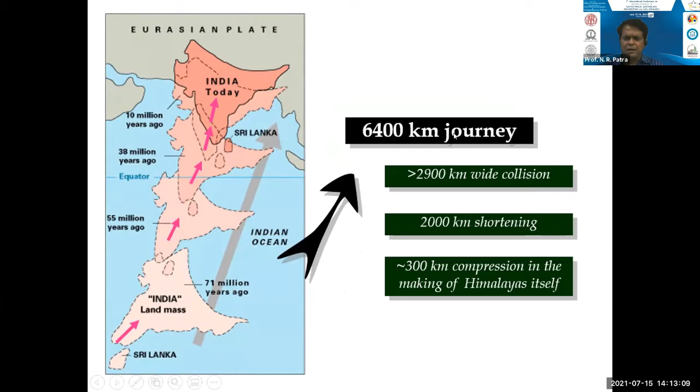Let me start briefly with how the Gangetic Plain has been formed, particularly in India, and how the Himalayas formed. It is about a 6,400 kilometer journey, and it started with 2,000 kilometers, and 300 kilometers of compression in making the Himalayas itself.

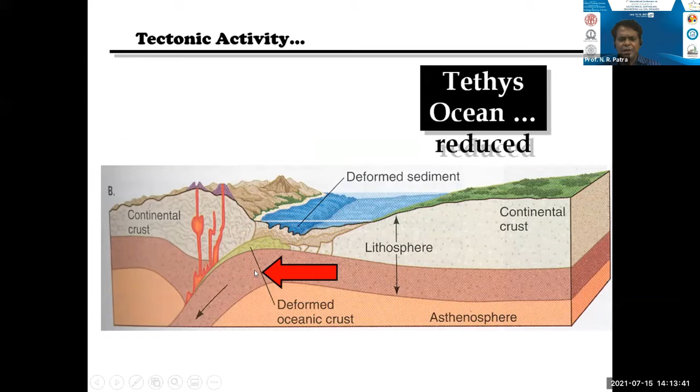Now in brief, how this Gangetic Plain starts. If you look at tectonic activities, initially there is an oceanic crust and lithosphere and sediments, and volcanoes are there. Over the period of time, this lithosphere deforms, and there is deformed sediment here, and deformed oceanic crust also. Over that period of time, new sediment mounts, and this broken off lithosphere continues and sinks. Then remains of the Tethys Sea - this is how the geological map of India looks.

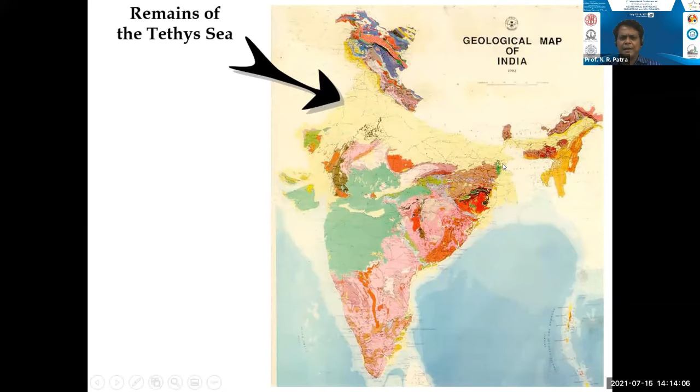Now, if I take it back, this is what we call your Gangetic Plain. It is one of the most seismically active regions in the world, I can say.

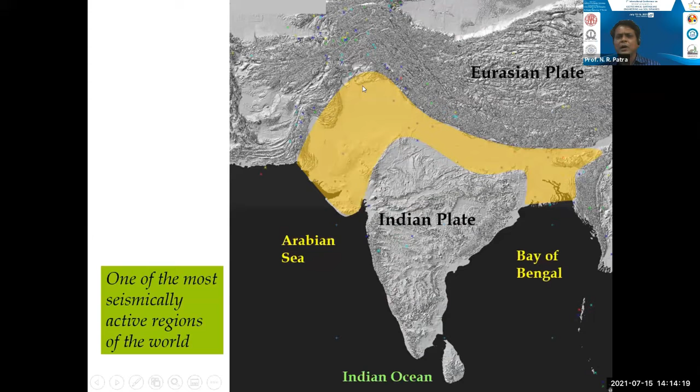These vast alluvial soils have plants and particularly ash dikes, in your power generation plants, coal ash based. These ash dikes require huge land and proper utilization is required. Based on that study, DST has given support, and we are moving forward.

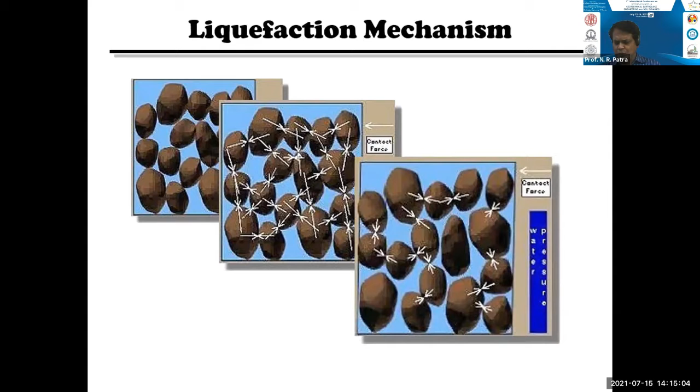I'll skip the liquefaction mechanism but give it in brief. It is because once pore water pressure increases, contact forces lose, and the liquefaction mechanism starts. Just in brief, so let me start with this.

What is the motive that we have moved around? It was a very painful study, I can say. Almost 36 pond ash embankments were studied. Initially it was decided along the Gangetic Plain, but later it was extended all over India. So almost 36 embankments were included in the study. Let me show a few examples of what exactly is happening, since we are sitting at Kanpur, near UP.

There are many thermal power plants - Jhansi, Paricha, Anpara, Korba, Obra, Panki, Raebareli, Renusagar, Vindhyachal, Talcher. Talcher is on the eastern side, along with Aligarh and Panipat. These are very close locations to us. However, we moved from there to the southern side, and also went to Gujarat, Bihar, Odisha - all along these places we collected ash and pond ash samples, and a detailed study report was submitted in 2009 as a comprehensive paper.

Now, looking at the pond ash present scenario - how ash disposal happens in India - this is very common: one is wet disposal, and the other is dry disposal. Generally dry disposal is avoided because it creates environmental pollution. Wet disposal involves mixing with water into a slurry.

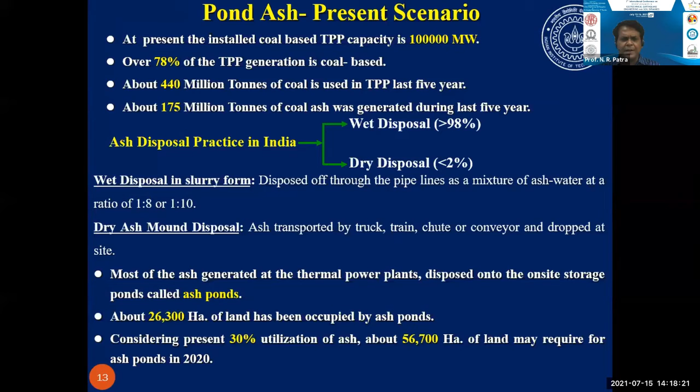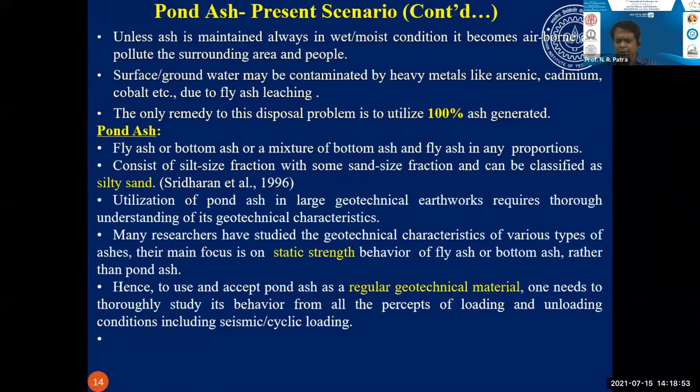If you look at pond ash, particularly it's a mixture of bottom ash or fly ash in various proportions. As per Sridharan in 1996, it has basically been classified as either silty sand or a sand with more fine fraction. A study started particularly in 2008 in this area, and it is still continuing.

Instead of showing all results, I'm picking up 3 different parts - this is from one of the PhD thesis studies. One is Kolkata side, second is Uttar Pradesh where I'm sitting here, the Panki type, and the extreme one is Panipat, Haryana, which falls in seismic Zone 4. These locations were taken as case studies.

Before going to sample preparation and other things, we started from scratch - field study including standard penetration test, seismic downhole test, and density measurements were all carried out. Laboratory studies included geotechnical tests, chemical analysis, and cyclic triaxial tests - all of this was done.

So what does the standard penetration test mean? Once carried out, it gives an impression that this deposit ranges from loose state to medium dense, not even dense. In almost all cases, the SPT-N value varies between 5 to 10, sometimes 10 to 15 - this is the range. This is the first indication that it is either in a loose state or in medium dense conditions.

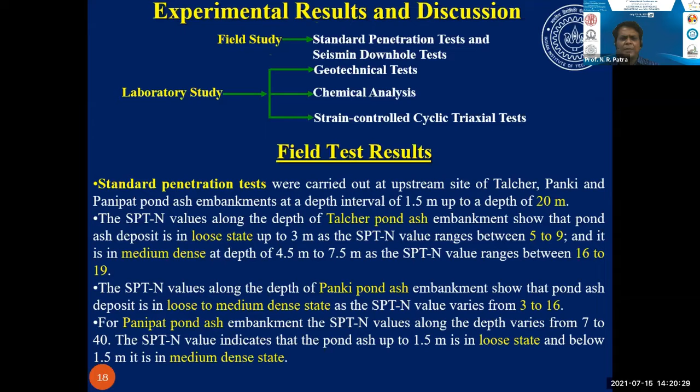From the field study, we collected samples, and it is very difficult to take undisturbed samples, particularly pond ash from the surface, so it has been remolded. Now there are 3 classifications I put in - Talcher, Panki, and Panipat. Talcher and Panki pond ash come under poorly graded sand, while Panipat pond ash comes under silty sand.

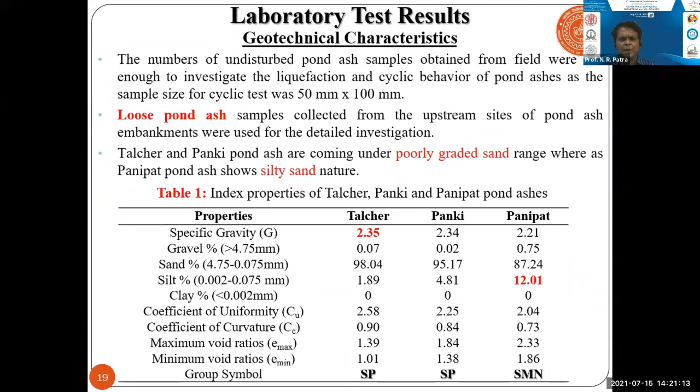If I classify, this will be SP, SP, and SMN. This classification is there. As this sample is very difficult to prepare, there are 2 types of sample preparations generally we go for, based on relative compaction and relative density, depending upon how much of your fine fractions are there, and how much coarse fraction is there.

By means of moist tamping technique and suction method, once it is a relative density kind of sand, you are doing cyclic triaxial or simple triaxial CU and CD tests, then you have to go by means of suction. Another problem is that, let me go back to this one.

Particularly if you're taking the pond ash and preparing by means of relative compaction or relative density by applying suction, there is high chance that this entire part will go inside and choke the valve. So proper drainage and proper saturation may not happen. So a GeoNet has been provided so that it will prevent particles going inside.

This is the beauty, so details I could not get the photographs. Otherwise, this sample preparation technique is challenging, and it has been done by means of moist tamping methods, as well as GeoNet provided for CD test or CU test around the periphery of this.

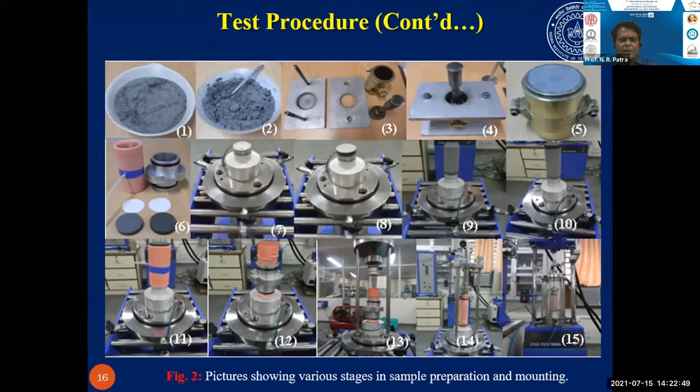and relative compaction on liquefaction resistance, particularly for 3 ponds: Talcher, Panki, and Panipat. If I look at these 3 graphs, cyclic strain versus number of cycles for initial liquefaction, these are 3 cases I put it: A is considering loading frequency, B is the effect of confining pressure, C is relative compaction.

If you look at the effect of relative compaction on liquefaction, the potential is more significant, particularly for Talcher Pond ash samples as compared to Panki and Panipat. So Panipat Pond ash sample shows higher liquefaction resistance as compared to Talcher and Panki Pond ash under a particular frequency.

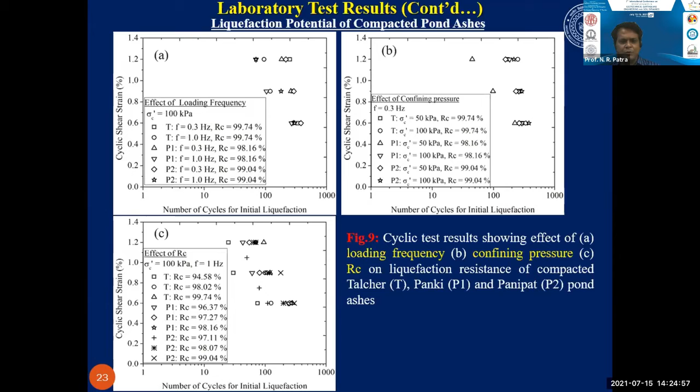These are all step by step. Once the field study gives indications of a loose state, then we go for cyclic triaxial and static tests. There we got some results. Then we go for this analysis, and then we draw conclusions based on what we are getting.

Now similarly, if you look at this, particularly the dynamic properties of the compacted ponds, typically I put 2 figures: dynamic shear modulus versus number of cycles, and damping ratio versus number of cycles.

So if you look at this figure, the percentage increase in dynamic shear modulus with decrease in cyclic shear strain from 1.2 to 0.6% varies generally from 7% to 15% and 10% to 21%. This is what gives clear indications of how it changes depending upon where it's located, what magnitude of cyclic test, and what proportion of fine content is there - all will come into picture to explain why it is happening.

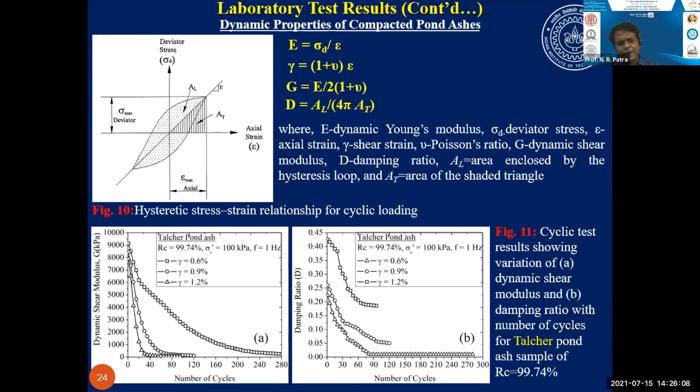Though Talcher Pond ash is located differently and Panipat is located differently, I just put 3 extreme cases. Then come to the next part, which is the degradation index of the compacted ponds.

The degradation index is well defined by Idriss 1978. It's a ratio of the dynamic secant shear modulus at the Nth cycle to the dynamic shear modulus at the first cycle. This is well defined. If you look at the degradation index part, Talcher is degrading at a very fast rate.

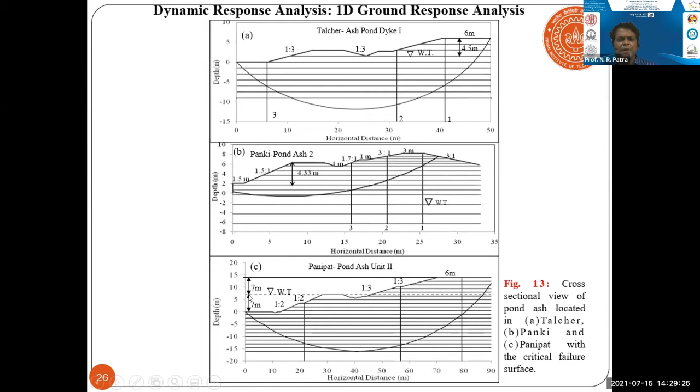If you look at this, this is Panki Ash Dyke, this is particularly Panipat Ash Dyke, it is 6 meters. Here the water table is located approximately from the crest, below that, 7 meters is the water table here. And detailed dimensioning has been given.

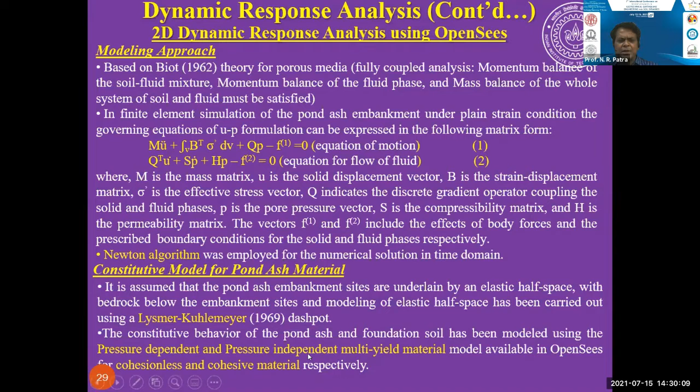Now come back to 2D response analysis. It has been done by means of OpenSees and constitutive modeling, particularly pond ash material, using pressure dependent and pressure independent multi-yield material models, generally used for cohesionless and cohesive materials.

Particularly 9-4 quad UP element, 9-noded with corner, 9-noded having 3 degrees of freedom, and this interior will be 2 degrees of freedom, and zero length elements will be applied.

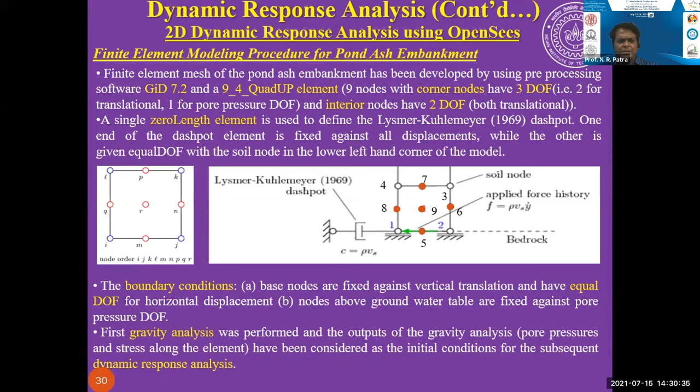First gravity analysis has been done, then followed by dynamic response analysis. This is how the numbering has been done, and this is the material property depending upon the confining pressure and other conditions. This input material property has been taken from our dynamic or cyclic triaxial as well as static test results.

So this is how the detail has been given, what input parameters we have taken. Then detailed convergence analysis has been done, and validation has been done with previously reported results. Though it is not with this embankment, it has been reported particularly with a 4.5 meter clay sand embankment. This is how the validation has been done, and graphical representation is there.

Now if you come back to the dynamic response analysis, one is crest, upstream side, and the numbering is as with this. This has been done with the help of GID 7.2 and Origin Flow 8, and the visualization has also been taken into picture so that we can take care of every part of what is happening.

Now let me come back to the first one, the visualizations. If you look at here, variation of horizontal displacements of existing conditions, that means there are two conditions considered for this analysis: one is the existing water table condition, and second is full saturation, which may be the worst condition.

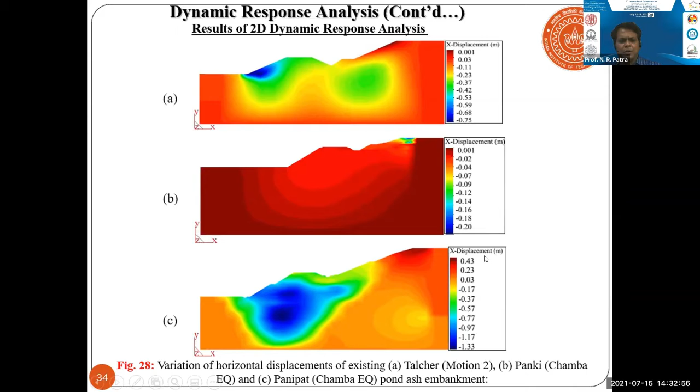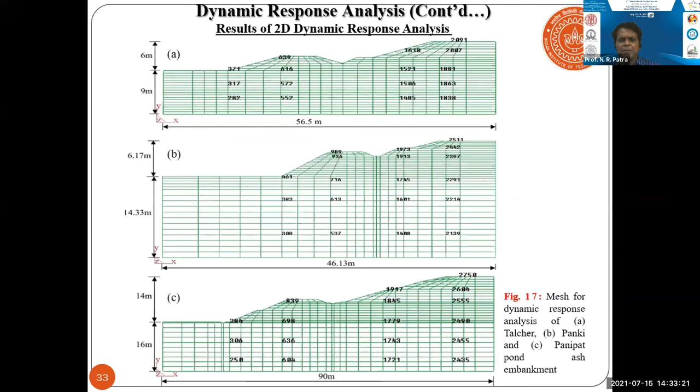So if you look at the ranges, this is a typical diagram. The horizontal displacement is 1.33 meters, it's quite large. Then similarly for vertical displacement, it is about 0.45 to almost 1.6, 1.7, 1.8 meters. The node numbering has been done, I showed the typical part of how the node numbering has been made and from there how it has been done.

This visualization shows the variation of vertical and horizontal displacement for existing conditions, meaning we've put it as if the water table is the same condition as existing in the field.

Based on this, we have three parts: field study and laboratory study, which give indications directly. The shear velocity value and SPTN value have been utilized, and laboratory dynamic properties have been taken into consideration. Then we carried out the response analysis for almost all bundhs, and a comparative study has been made and classified zone-wise.

What kind of bundhs are there? Earlier, different classifications like CA existed, but we have given detailed guidelines on what is supposed to be done.

Let me put the conclusions in a simple way. The results of 2D analysis reveal much higher deformation values, about 0.21 to 2.32 meters horizontal and 0.41 to 2.03 meters vertical. So almost all bundhs are susceptible to liquefaction. I have shown these three cases.

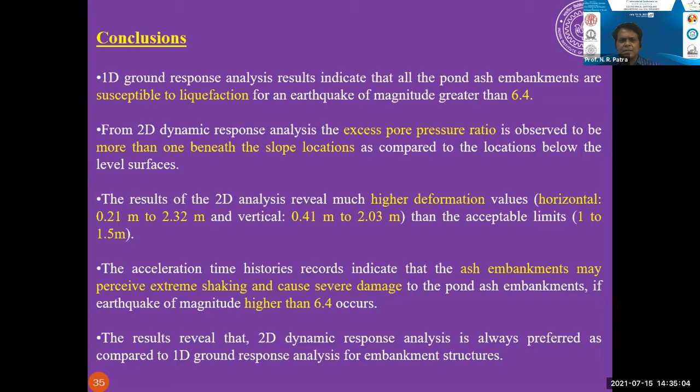Now let me start with a new one. This was challenging - it is the Renusagar bundh embankment.

If you look at the sea level here, it's 352, and here it's 300. So this is a 52 meter high bundh embankment. Professor Dayal had started this design at that time, but later it was changed. Now there is bund 1 and bund 2, so it's almost 52 meters.

The groundwater table is 7.5 meters below the crest. This was interesting - similarly, we started generating our own finite element code, OpenSees, along with other parts.

Using SPTN values for this particular bundh embankment and foundation soil - this is from a publication by Yadav et al. 2011. Looking at this bundh embankment in Sonbhadra district, this is the Renusagar bundh embankment, 52 meters height.

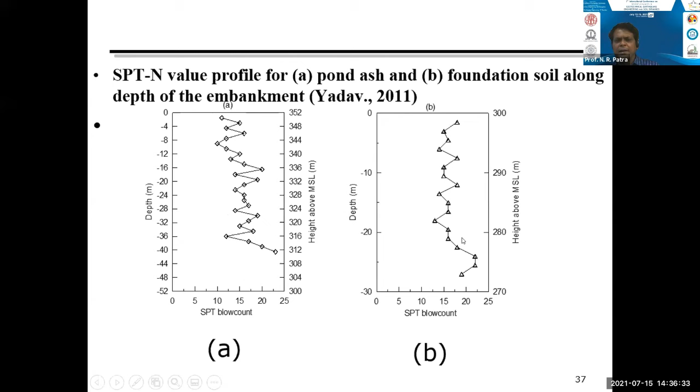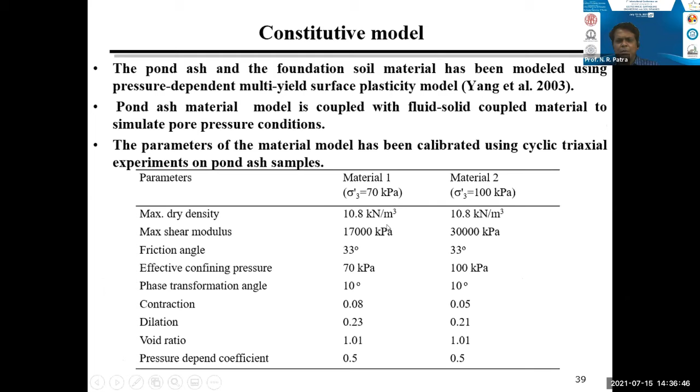Then finite element analysis has been done using OpenSees, which has been developed. Material properties were determined through experimental investigation. The backbone curve using finite element analysis was developed based on cyclic triaxial experiments.

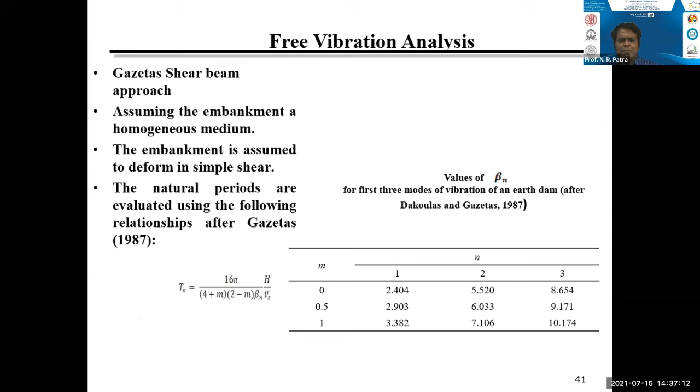Then free vibration and post-vibration analysis has been done, and natural periods are evaluated using the relationship given by Gazetas.

For this bundh embankment in seconds, looking at the mode, the first mode after Gazetas 1987 is 0.63, and based on our finite element study, it is 0.7.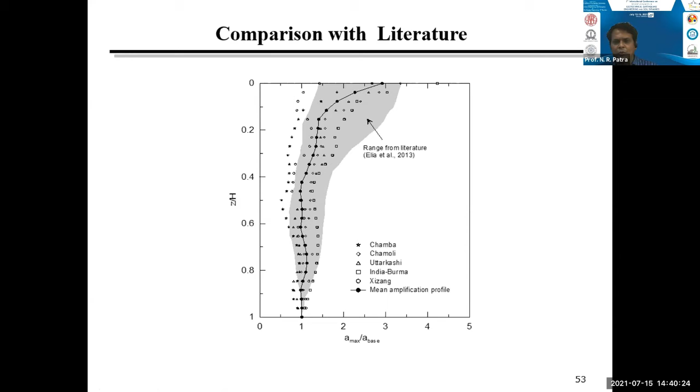The Chamba and Xizang earthquakes, having low magnitude, provided the lower bound, whereas Uttarkashi, with the highest magnitude, is in the upper bound. From the numerical investigation, we put this as a case study.

It is a 52-meter height embankment. A significant amplification in the acceleration response has been observed between the base and crest of the embankment. The pond ash embankment has shown susceptibility to liquefaction.

Next stage, this is what we have just started with - geosynthetics and ground improvement techniques all over. How it can be done, since it is already constructed.

First raising, second raising, third raising - these stages are there. So buttressing, we are just now involved in, either partial buttressing or full buttressing. This is how the extended study continues.

Consultancy is different, and this is the kind of research study going on. The entire presentation I have taken from the publications of my students - these are the selected publications from where it has been taken.

It is really very difficult to do stress analysis, field study, lab study. It was kind of painful - going to the field, staying there, and doing the job.

But thanks to the students, all those who have been associated - almost 6 PhD students graduated considering this area, and 10 to 12 MTech students. I thank all of you.

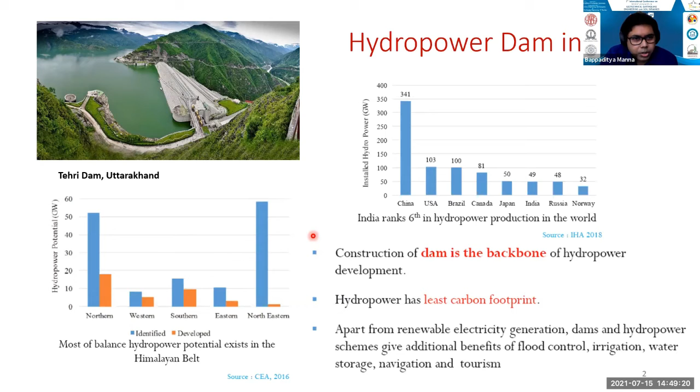Now, the problem of dam foundations arises because there are a lot of uncertainties in the properties of the rock at the identified potential site. Since the dam is a massive structure, it develops high stresses in the foundation due to the large load imposed by the dam body itself. It has been found that 20% of failure cases happen due to foundation failure from the excessive load of concrete dams. So the most significant problem is the soil-structure interaction with the dam and rock foundation due to troublesome geometry, which needs greater attention. We need to understand how to design a dam foundation properly if there is a joint filled with clay material, or if a shear seam exists at the site.

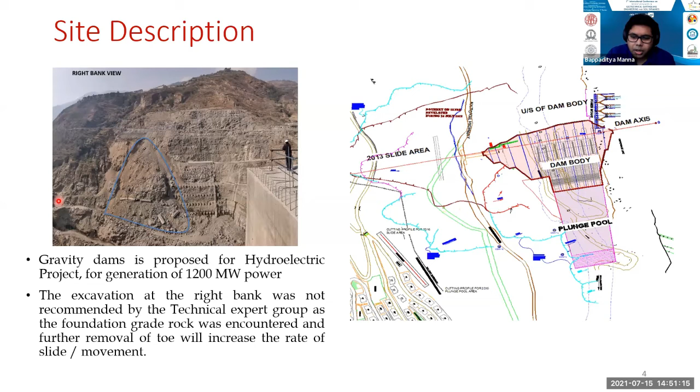This kind of problem arose at a certain location - I'm not naming the site because of the NDA agreement between IIT and the client. There is one site proposed for a hydroelectric project of about 1200 megawatt power, and we found that on the right bank of the site, a huge rock slope failure occurred, making this part very unstable. Cutting of the slope was not possible because whenever we cut the toe, all the slopes started failing - and this involves a huge rock mass, so if this kind of failure happens, the whole thing would be crushed away. The client approached us, and 1 to 13 segments of the dam were proposed. Segments 1, 2, 11, 12, and 13 exist on the left and right parts of the slope, which is fine. But in segments 8, 9, and 10, there was a lot of weathered rock, and if cutting started there, we might reach the parent rock or foundation rock.

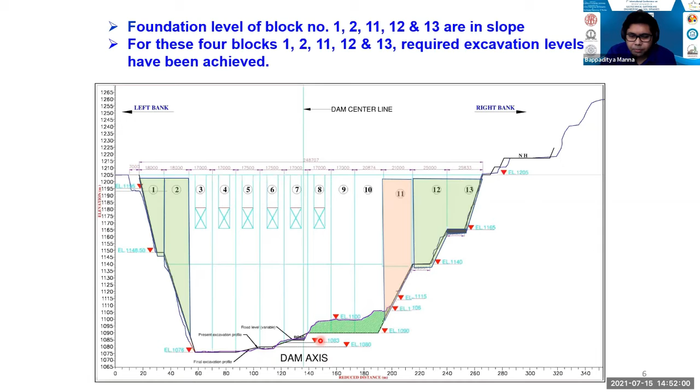The problem was that when you start cutting this part, the whole thing may get collapsed on the right bank. So there was an issue of how to tackle this problem and what the possible solution could be. Blocks 5, 6, 7, and 3, 4 were okay because they reached up to the foundation grade rock, so construction and excavation could happen there.

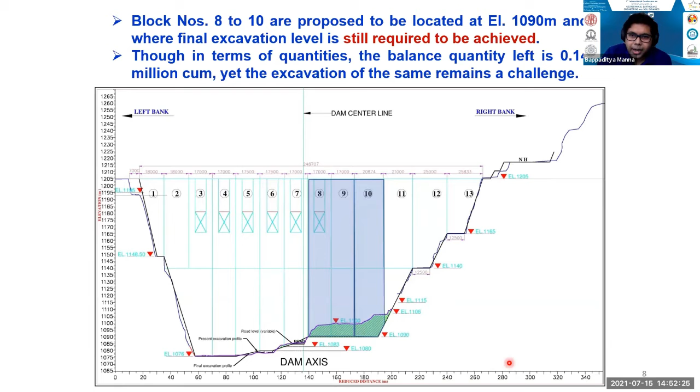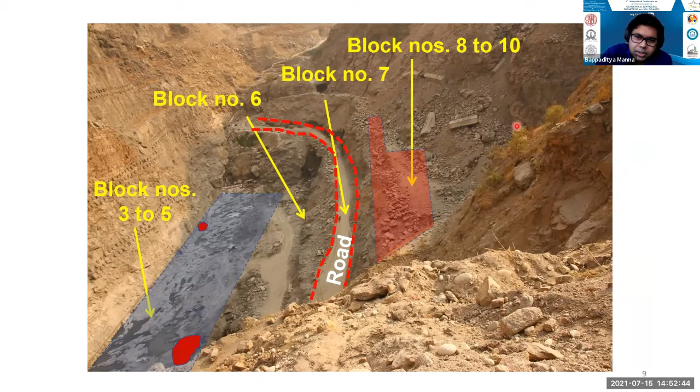The challenges arise for blocks 8, 9, and 10, where a lot of loose material exists, and you can't cut it because the right bank slope will become unstable. Looking at the site location, you can see blocks 8, 9, 7, and also block 7, 6, 3, 5 which had no issue. But here there is an issue because you can't excavate further to reach the parent rock or foundation rock, because otherwise the right bank will collapse.

Another challenge was that during the soil or ground investigation, it was observed that a shear zone exists at the exposed cut slope, lying just below between blocks 6, 7, 8, and 9, with a thickness of around 8 meters. So they suggested not to excavate further, and we need to first take care of the shear seam and also the loose soil. There are two things here: one, we should not cut further because of the collapse risk on the right bank, and two, we need to take care of the shear seam existing below the foundation.

So they came up with a solution: why not place piles at certain block numbers? So they placed the pile foundation at blocks 8 and 9, expecting that the maximum load from the superstructure, the dam, can be transferred to the parent rock or bedrock, so that stresses or load on the shear seam can be avoided. This is basically the load transfer they are expecting, placing this foundation and building the dam at the various blocks.

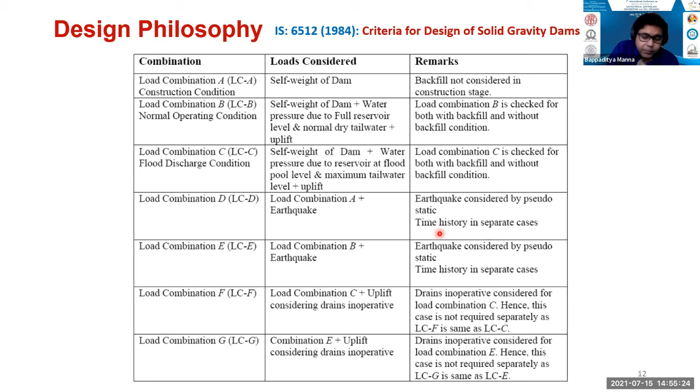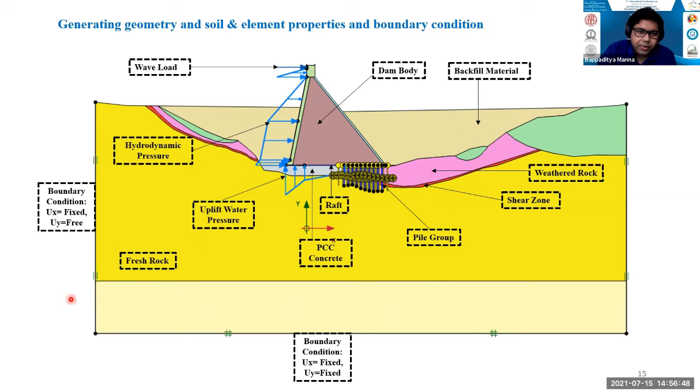As far as the modeling part is concerned, we consider the soil and rock with 15-noded triangular elements with cluster features, and the dam body is considered to be a 15-noded triangular element with polygon cluster feature. Raft is modeled with plate features, and similarly for the pile with plate feature, considering the effect of spacing in the plane strain.

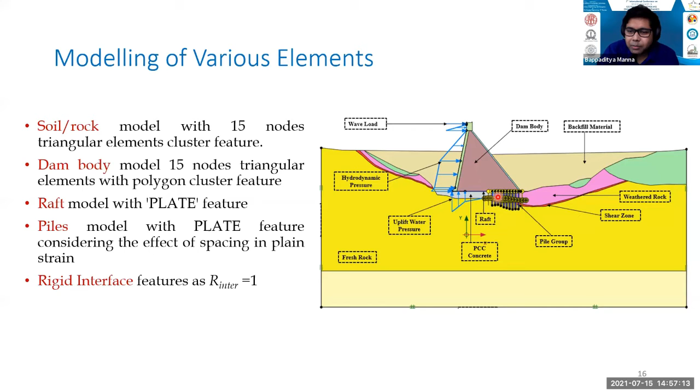And the interface we are considering to be the rigid element, meaning it's a rigid contact between the dam and the foundation soil.

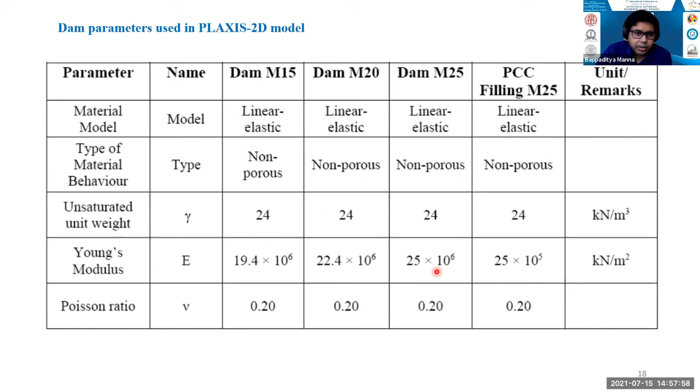The dam parameter has been taken corresponding to M15. The PCC has been done with M25 concrete. So these are the very standard properties taken, and these are the standard process.

First we create the mesh and generate it, considering the element with fine and coarseness factor varying from 0.25 to 1. For the initial condition, we first apply the gravity loading to generate the in-situ stress.

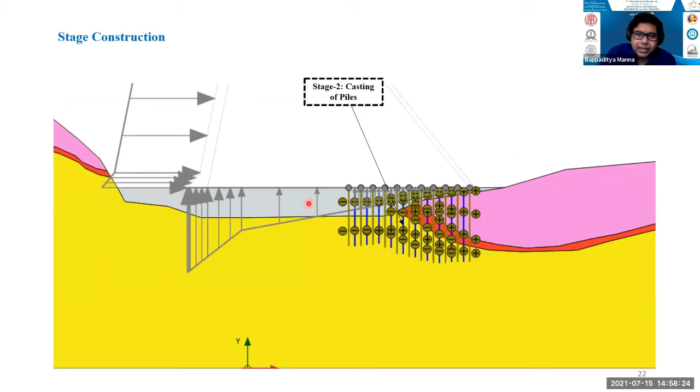The stage construction means first filled with PCC up to the foundation level, the second stage is casting of the pile, and thereafter we cast the raft. Then we apply the load of the dam, which is constructed and placed on the raft pile foundation system.

In the first case, there is no tailwater considered. Then in stage 5, we consider the full reservoir elevation, with no tailwater on the downstream side, and normal uplift pressure. Stage 6 is basically the reservoir at maximum level, all tailgates open, with normal uplift condition. Stage 7 is the combination of A and the earthquake.

Similarly, F is the combination of B with earthquake, combined as per the IS code where all drainage holes are inoperative, that is for the maximum uplift condition. Similarly, load G is the combination with E, but with extreme uplift. So all combinations have been considered in the analysis.

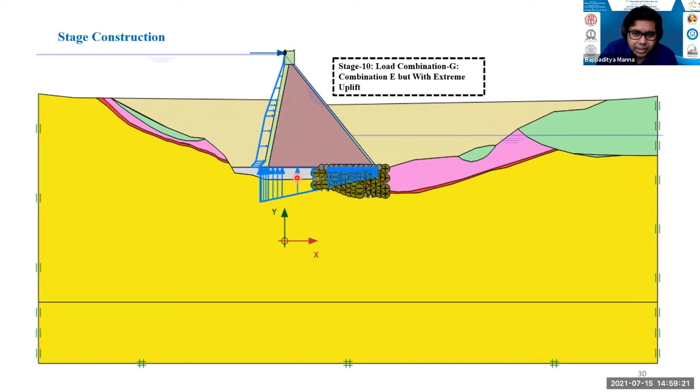So here I'll tell you how to get the parameter for the seismic condition and what are the various types of results we obtain.

As per IS 1893, the site belongs to zone 5, so we consider the seismic zone factor as per zone 5, that is 0.36. Our horizontal acceleration coefficient has been taken as 0.36 G, and vertical acceleration coefficient as 0.24 G. That has been given as an input to the PLAXIS.

One is the design basis earthquake, time acceleration history in the horizontal and vertical directions. Based on that, the peak ground acceleration for the horizontal is 0.316 G, whereas for the vertical case it is 0.206 G.

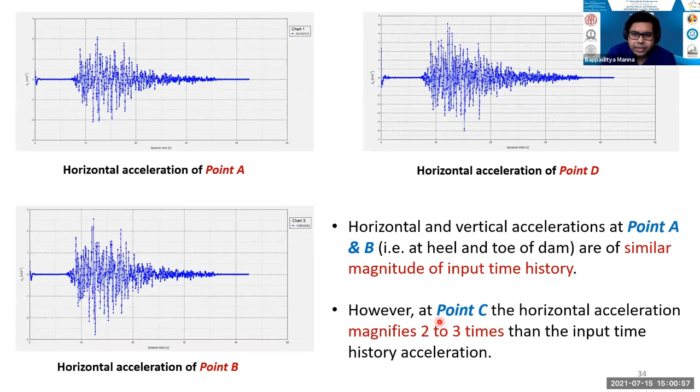So we apply both cases in the PLAXIS model and try to see how the dam and foundation system behave. We have taken different points here, and we found that at the top, at point C, it magnifies maximum, that is 2 or 3 times the input acceleration history.

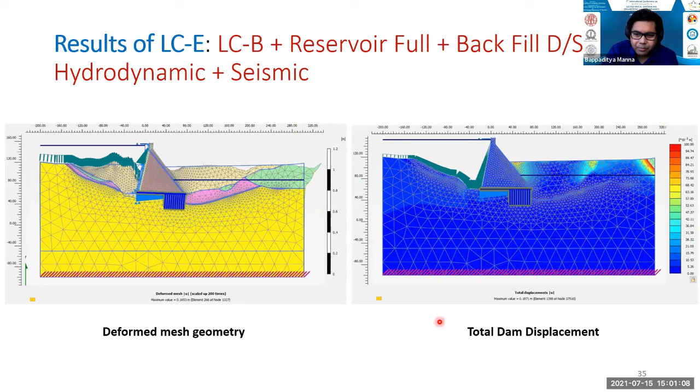So these are the different typical results of the analysis: deformed mesh, dam displacement, principal stress, and deviatoric stress. What we found is that maximum compressive stress is just exceeding the allowable compressive stress at certain locations, that is at the toe and the heel level, and other parts are okay.

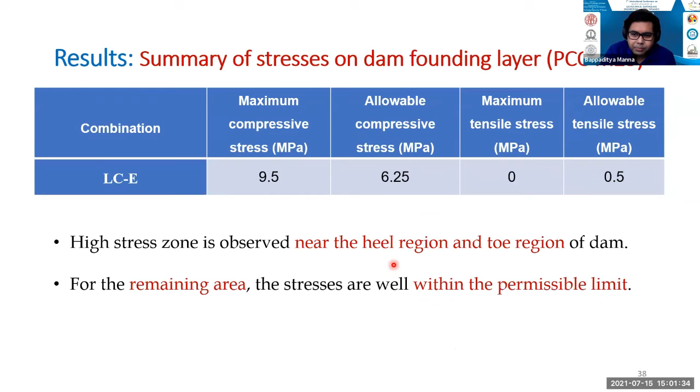And similarly, for your dam founding layer at the PCC level, it also exceeded near the heel and toe region, but other parts remain stable, that is within the permissible limit. Similarly, at the rock foundation, it has been found that it is less than the allowable peak rock mass compressive stress.

So if you see the behavior of the structural members, that is the raft and the pile group, you can see the settlement response, the axial forces, and the bending moment on the pile. And this is the shear force of the pile, required for the calculation of reinforcement.

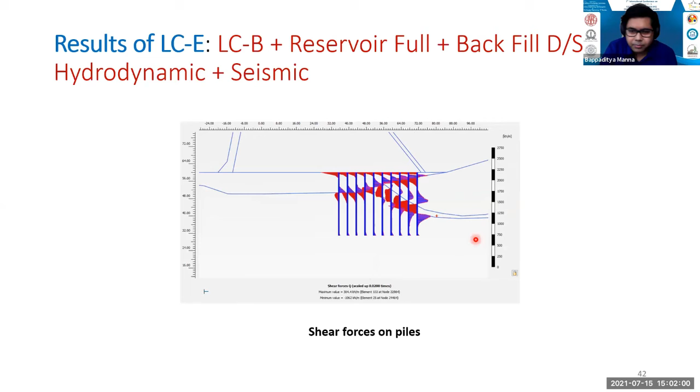That is not the concern of geotechnical engineering, but we pass on all the information to the structural engineer. So this is the bending moment on the raft and the shear forces of the raft. This is very standard.

So what we found as a geotechnical engineer is that pile axial force is well within the permissible limit, because the allowable vertical pile load we found is around 4,000 tons, which is much less than that. And maximum settlement is coming up to 43 mm, and the allowable is 50 mm.

If you see the latest code IS 16700, that is the criteria for structural safety of tall concrete buildings, it has recommended 50 mm. But if you go by IS 2911 part 4, it says 25 mm. But there is no code specified for what to take for the dam foundation.

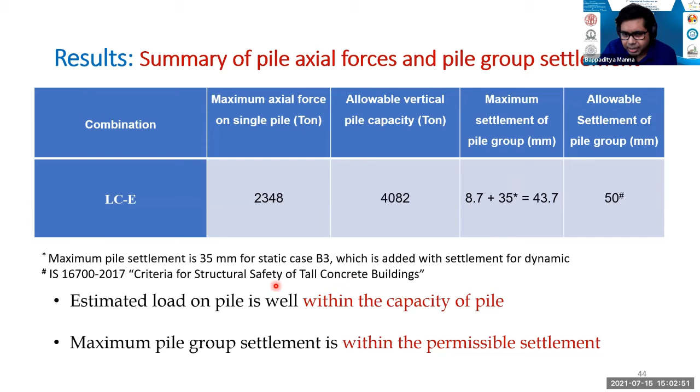Therefore, we adopted the same approach as for tall structures, where the raft-pile foundation has been recommended. So we went with the 50 mm settlement, which is within the permissible limit.

Similarly, you can see the settlement of the raft is also within the permissible limit, but no maximum differential settlement criteria is given for the dam. This is almost negligible; 1 by 3,500 is quite less.

We have also compared the pseudostatic analysis with the time history analysis. We can see that they mostly agree with each other, not much difference, except for the pile load, where it's almost double the maximum axial load on the single pile with the time history analysis.

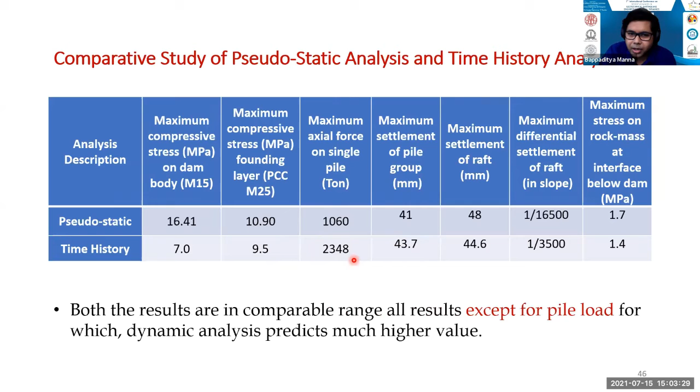Still, with the time history analysis, the load on the single pile is less than the safe load carrying capacity of the pile. So, final recommendation.

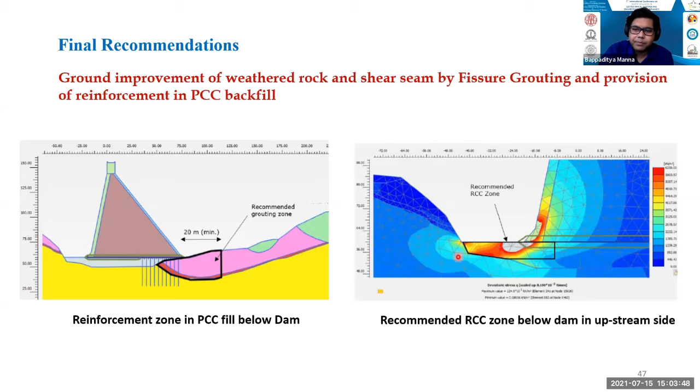Just one more slide on the final recommendation. Yes, we can reinforce the zone with PCC fill below the dam, and we can recommend RCC below the upstream side where we are getting a very localized stress concentration. So this has been recommended finally.

So it's not very suitable for industrial problems because the time is very limited there. So I will conclude here. Thank you very much for this opportunity. Any questions? Thank you.

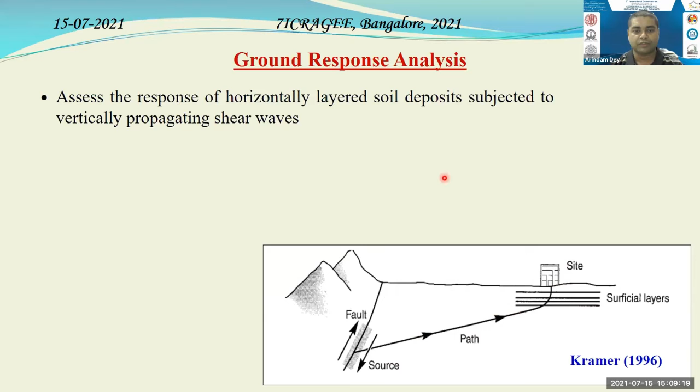For different utilities, we try to predict the ground surface motions, we try to develop the design response spectra, we evaluate the dynamic stress and strain for the estimation of liquefaction hazards. One of the most important things is that we try to determine the induced forces in structures and find their response, as Professor Manna was rightly pointing out, from geotech to structures, how the thing propagates.

When we look into the world of ground response analysis, it is basically a vast world. We can do different types of analysis: 1D, which is most common, 2D and 3D are also in use. We can think of it in terms of linear analysis, equivalent linear, or the complex nonlinear analysis. We can do it in frequency domain, time domain, or mix the two for hybrid analysis.

Depending on the absence, presence, or negligence of pore water pressures, you can achieve a total stress or effective stress analysis. In terms of bedrock characteristics, you can consider it rigid, where you model the bedrock itself, or an elastic bedrock system, which more represents a hard soil; it still has dynamic impedances. It may be permeable or impermeable, whether it allows water to flow through or not. Most importantly, this world has a lot of rules governing the loading, unloading, and reloading criteria, Masing, non-Masing, and various types of loading, unloading, and reloading rules.

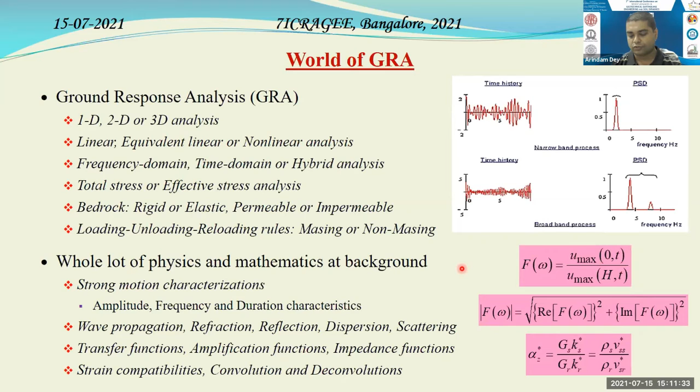When we try to convert the surface response to the bedrock level, or vice versa, we use convolution and deconvolution. In this type of nonlinear ground response analysis, we basically carry out a time domain analysis.

We convert, or imagine the continuum system to be represented by a series of single or multiple degree of freedom systems. We consider a lumped parameter system, lumping the masses, stiffness, and deformations of the system into specific units.

Basically, we solve for the equation of motion, which incorporates the mass, stiffness, and damping matrix, and we try to find out the displacement of the system in terms of the induced ground motion. Instead of displacement, one can use induced velocity or acceleration as well, we just need to cater it properly in this equation.

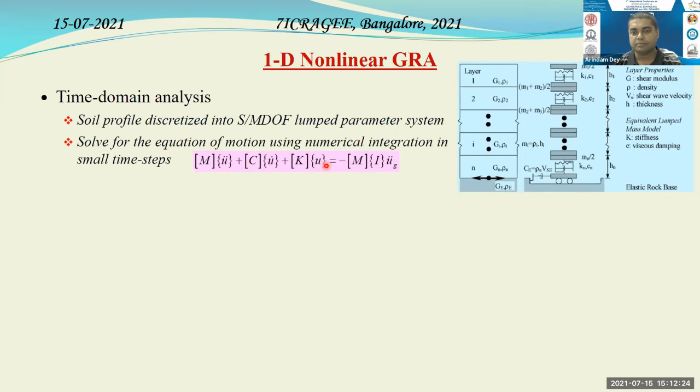We solve this equation through numerical integration in small time steps. Time integration schemes are developed and available, and might be explicit or implicit depending upon the call.

The most important thing required in such solutions is basically the judgment of the cyclic nonlinear stress strain models. Different types of models are available: Masing, Ramberg-Osgood, HDCP models. I'm not going into those details.

The most common model we use is the pressure dependent hyperbolic model developed by Matasovic 93, which has seen many improvements, where we try to induce strain dependent damping and strain dependent shear modulus to take care of loading, unloading and reloading rules. That behavior, largely used, is by Philips and Hashash.

When cyclic loading, unloading and reloading goes on, there is an intricate rule which needs to be followed for the development of shear stress and strain. It is one of the expressions which govern that. We need a hysteretic damping reduction factor.

As you cyclically load and unload the soil, some amount of energy is lost, which is related to the damping, so this hysteretic or cyclic damping reduction factor is used. Pore water pressure generation models are used if your system incorporates water or the groundwater table. We also have to take care of dissipation models, based on consolidation theories.

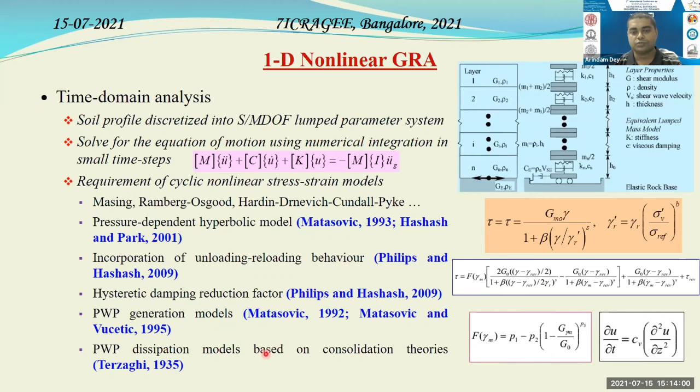Now, all these incorporated into one simple system, that's when we arrive at the time domain analysis. Individually the systems are complex, but we have regular inbuilt systems which you can always use.

The main inputs to GRA are the dynamic parameters, the backbone curve, shear modulus and damping ratio, which are strain dependent parameters. We rely a lot on the hysteresis plot, which is the cyclic loading, unloading and reloading as you go on loading the sample with number of cycles.

When you join the peak stress reversal points, we get what is called the backbone curve. One can imagine this as the stress strain curve over the entire loading, unloading, reloading cycle under dynamic condition.

Each hysteresis curve is characterized by different modulus. One is the tangential shear modulus, which we mostly use in nonlinear analysis. One is the secant shear modulus joining the origin and the point of stress reversal. The other is the initial or instantaneous shear modulus at the small strain level.

Depending upon the hysteresis loop, number of cycles, and different parameters, it might be symmetric or asymmetric. Based on the nature of the hysteresis loop, you can evaluate the modulus of shear for a particular strain level and its damping ratio.

What we get is this backbone curve, from which we find out the dynamic parameters of modulus reduction curve and damping ratio as a function of cyclic shear strain.

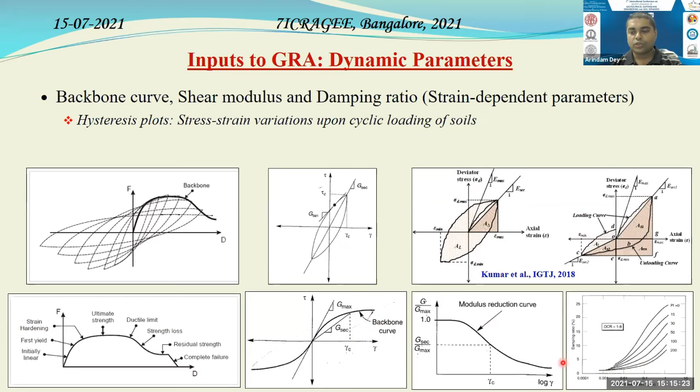Looking at this curve, it might look simple, but a lot of factors actually influence it: soil type, relative density, fine content, and other factors related to soil mechanics characterization itself, and over and above, the dynamic factors of number and frequency of loading cycles, and cyclic strain amplitudes.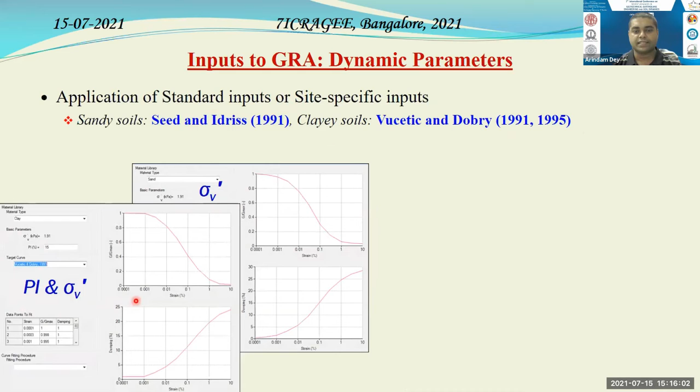When you do a ground response analysis, you can always use standard inputs well developed by Seed and Idriss, Vucetic and Dobry for sandy and clay soils respectively, available in any standard format, mostly dependent upon the effective vertical stress or effective confining stress, and the plasticity index for the clay system. However, you can also do a site-specific input induction.

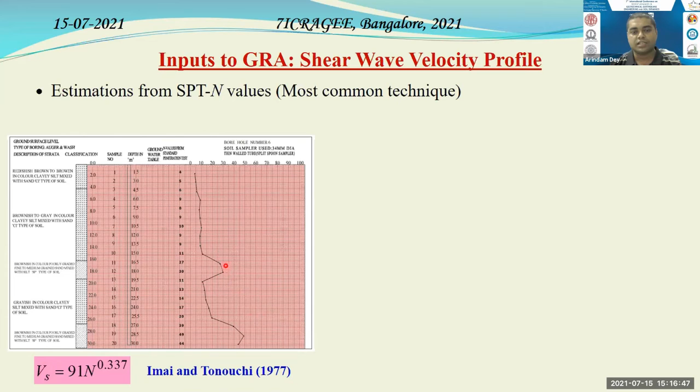You can collect samples from the site, conduct cyclic triaxial tests, and figure out the modulus reduction curve and damping ratio curve for a specific soil sample. One of the other important parameters is the shear wave velocity profile distribution. Mostly it's conveniently done from SPTN values, the most common technique in any soil investigation scenario. You find the SPTN value and use a power law to convert it to shear wave velocity. This is one of the most popular, by Imai and Tonouchi, developed in '77. However, there are many variants one can use depending on the soil characteristics.

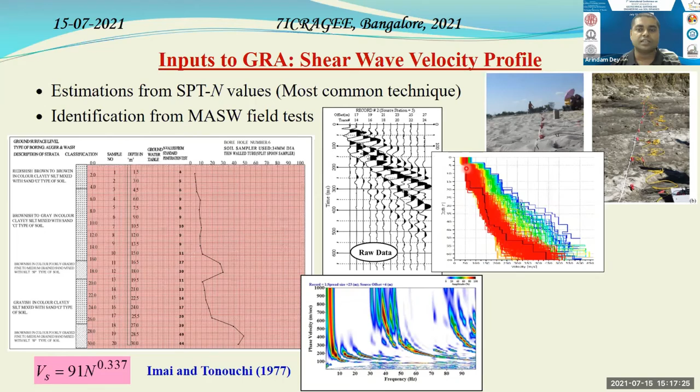Another way, if resources are available, is to conduct an NDT geophysical investigation in the field, conduct an MASW survey, lay out the geophones, find the time travel records or wavefront records, find the dispersion image relating phase velocity to frequency, and then do an inversion analysis to figure out the shear wave velocity profile with depth. Here you can find the number of layers, thickness, and velocity distribution with depth. In general it's done in 1D, but you can also do it in 2D so that over the entire space you can find the shear wave velocity distribution along depth and lateral direction.

Now this is the case study I wanted to focus on. We studied the IIT Guwahati and Amingaon region, where we conducted nonlinear ground response analysis. First, I should thank Reliant Engineers and our Institute Works department for providing an enormous number of boreholes in this entire area, from which we could figure out the different characteristics of the N values and relate them to shear wave velocities.

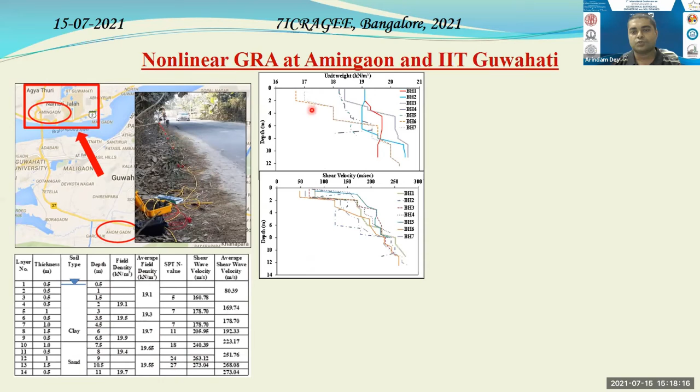We conducted many MASW tests along different regions in this Amingaon site and inside our campus as well. We could figure out, depending on different boreholes, the distribution of unit weight and shear wave velocity. As mentioned, we have our own results from cyclic triaxial tests on collected samples of clayey and sandy medium, and figured out the various shear modulus reduction curves and damping ratio curves depending on strain. Mostly in this region the soil is either clayey or sandy, depending on deposition in the alluvial bank of the river Brahmaputra. We subjected each of these boreholes, collected from different agencies, to a particular motion.

What should we look out for in nonlinear GRA? In this case, we looked at the variation of ground acceleration at different depths and the amplification generated. When we look into different boreholes, even though the region is small, we can see severe surface amplification, vividly different, which portrays the effect of local geology. This is very important when carrying out ground response analysis.

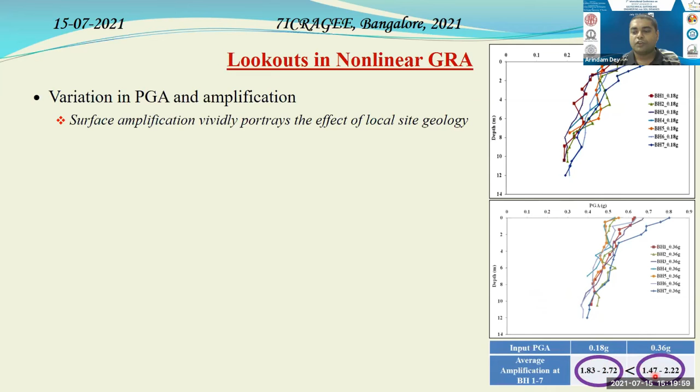If you see, for lower input motion the amplification is higher, and for higher input motion the amplification is lower, which is in a way common in the sense that for higher input motion, you basically have a higher amount of strain generated and higher amount of damping. That's why your amplification for higher input motion goes low.

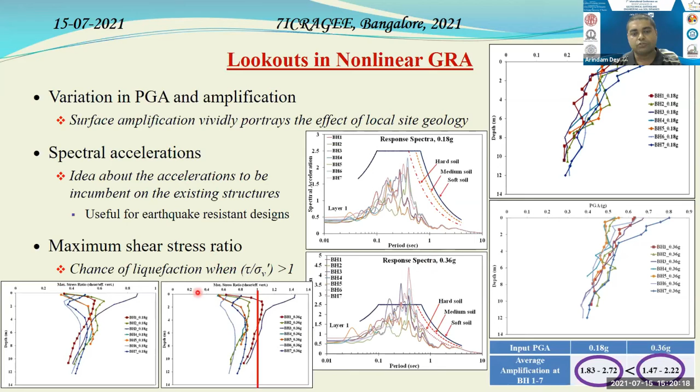You find spectral accelerations, which help you in earthquake resistant designs. And then you look for the maximum shear stress ratio. When this ratio goes above 1, it indicates the chance of liquefaction or mobility.

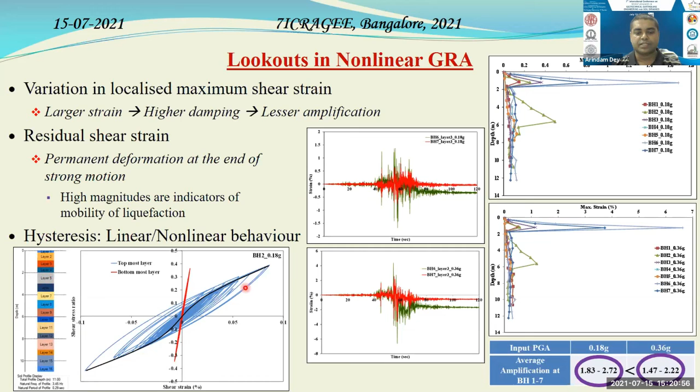Then what we did is subject the boreholes to very strong earthquake motion, 0.85G Kobe motion, and the results are more vividly evident. You can see a very high chance of cyclic mobility, the shift in the hysteresis plots, and a very high residual shear strain.

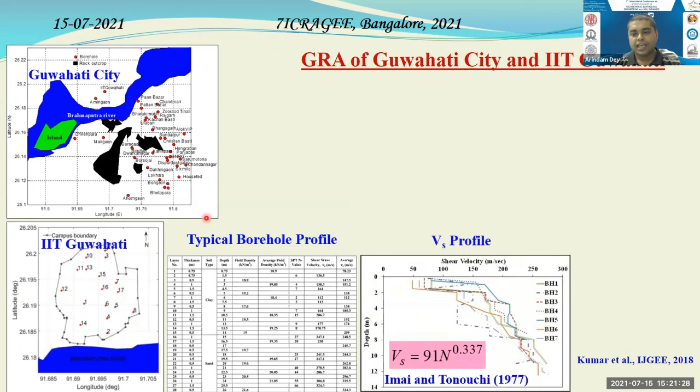This activity we extended from each of the boreholes to different places at IIT Guwahati, even for the Guwahati city. We carried out the same exercise to find out the VS profile variation, and then we used the Sikkim and Kobe motions.

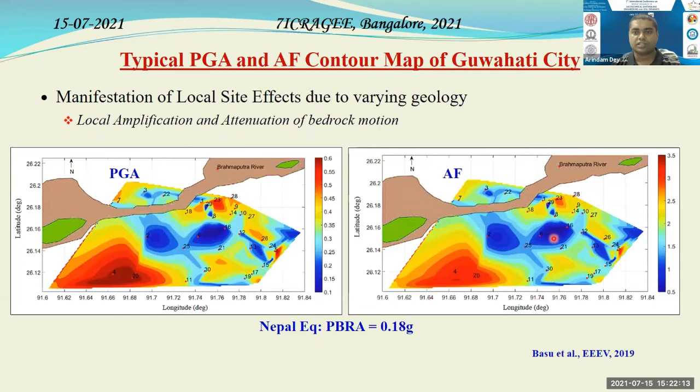How does it help? We can find out the entire region PGA and amplification factor, and you can see at some points there is not only amplification, but attenuation as well. Now these help in site-specific response studies. So local amplification and attenuation in the IIT Guwahati campus was also found.

So the way forward is that we do most of the things in a deterministic basis.

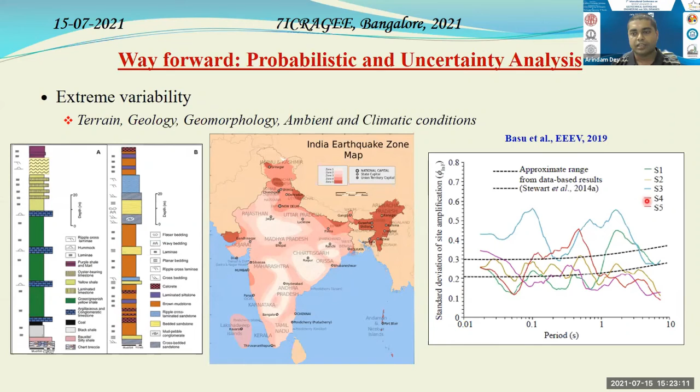Our soil and the terrain, geology, geomorphology all show extreme variability. We should incorporate probabilistic and uncertainty analysis. One of our papers discusses that in detail.

Further, what we need to incorporate is that we mostly rely on 1D. We definitely need to go for 2D, and spatial variability also needs to be incorporated. You can see from this plot, if you incorporate this, a lot of variations occur.

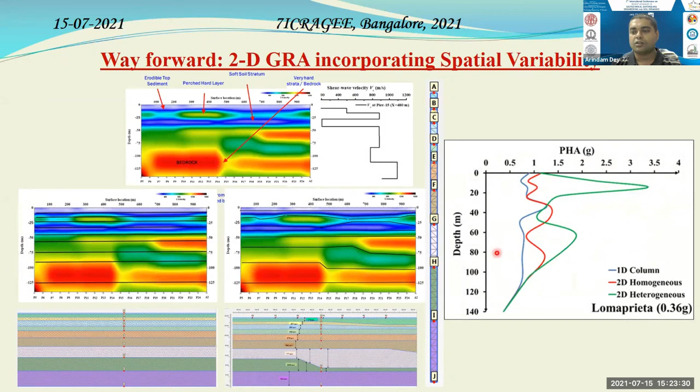The last thing which we need to understand as a way forward is that if there are existing structures, the GRA completely changes. So GRA in the presence of seismic soil structure interaction needs to be incorporated as well.

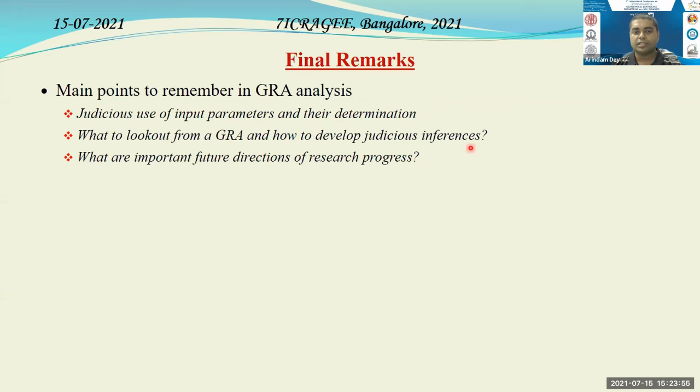So to mention the final remarks, the main point I wanted to convey is that you should judiciously use the input parameters, you should judiciously determine them. Which are the things you should look out for in the GRA, how do you develop judicious inferences, and what are the important future directions of the research progress.